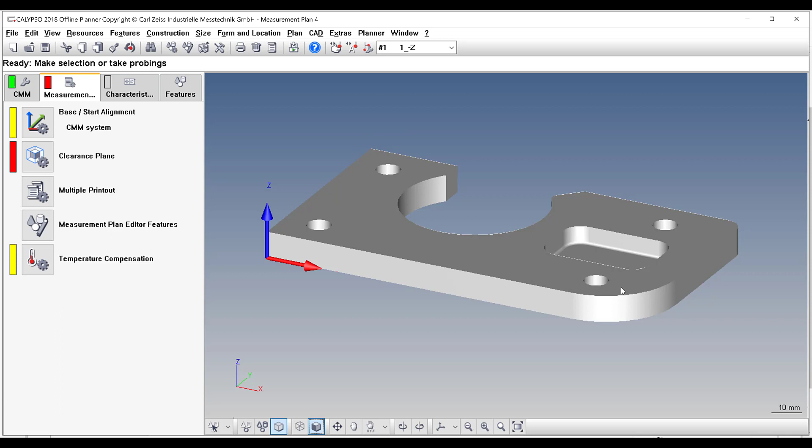Okay, so for this video, we're going to cover freeform surface around this workpiece to get the profile of a surface all the way around. We're also finishing inspection of mill part 4 here. So I've already imported the model. I have the drawing open, and you'll see we have this all around 10 thou profile of a surface to datum A. Datum A is the top of this workpiece.

All of the specs on the outside are basic to help, again, define the profile of a surface where it needs to be. All their specs are coordinate, so we'll take care of the alignment and the profile of a surface, and then we'll work on the rest of the pretty simple specs on this part. So I'm going to minimize here, get back into Calypso, and let's take care of our alignment.

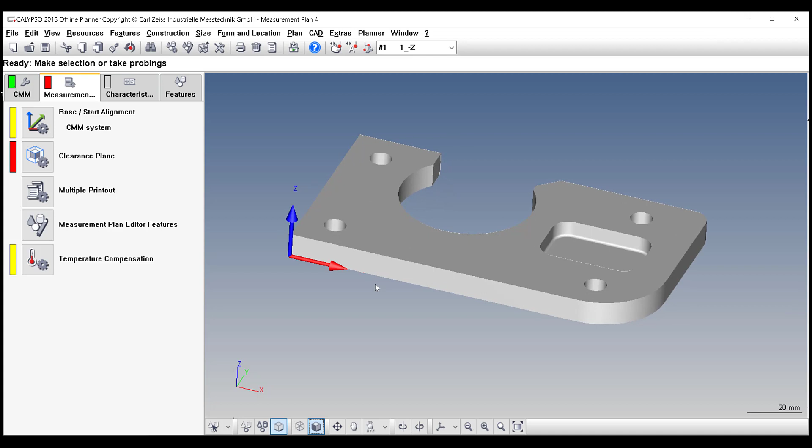Okay, so what I want to do is I'll get my start alignment. All right, I'm going to define the top plane. I'm going to define the front here. And then I'll define this left side. Okay. Then I'll hit OK. All right. Looks good. Let's take care of our clearance planes while we're in this screen here. Hit clearance planes from CAD model.

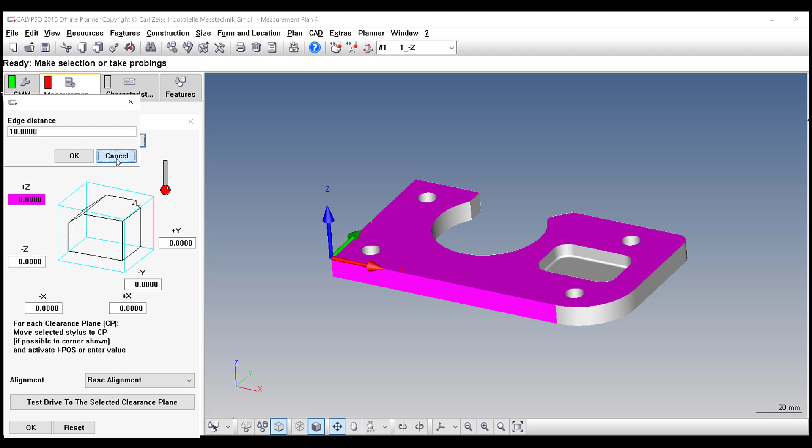I am in metric right now. Let's fix that. So to fix that, go to your measurement plan editor features, go into units, length unit, change to inches, and hit OK. Clearance plane from model. Let's change this to 1 inch. Hit OK. That's fine. Hit OK. All right, so now we're ready to start defining some things here, especially in our strategies. So we'll get into the features.

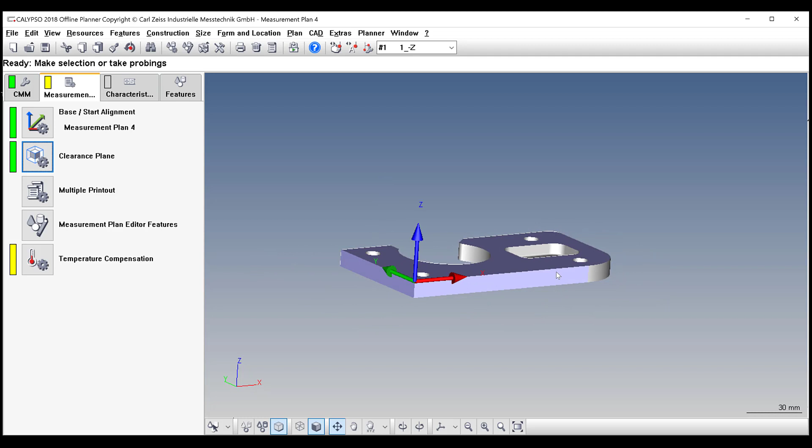None of these planes have a strategy yet, so I'm going to define plane 1 here. Take care of the strategy itself. A couple ways here. I'm just going to do a grid measurement. That does guess pretty well. The only thing I need to be careful of is how we're fixturing this. Are you fixturing to the holes with the fixture plate that was used to manufacture it? Things like that. You need to be a little careful.

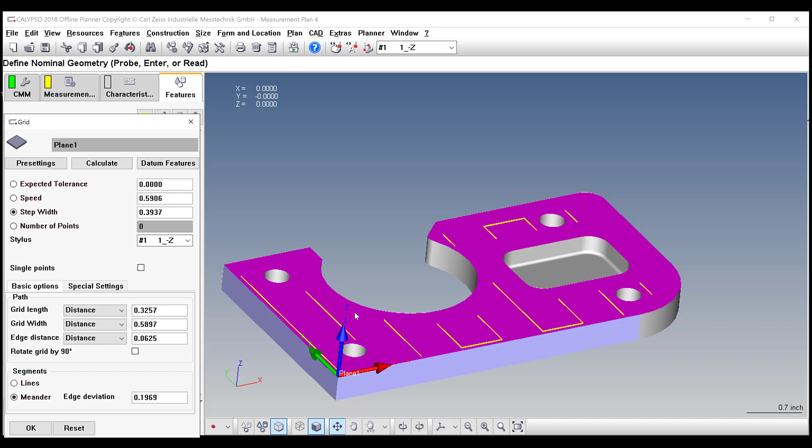We could put a clamp here. We could put a clamp here. We could grab it in a vise. Either way. So I'm just gonna leave that like this. We'll edit the grid. Let's take a look at some of the specs we can have here for distances and edge distance. Again, you could rotate if you want. All right. Let's do an edge distance of, let's say, a 16th. Let's double that roughly. Okay. That looks good. So we'll hit OK.

Now for the evaluation, I'm not going to get into the cookbook settings quite yet. If you're in class with me, I will show you the cookbook and we can type those settings in. But I'm not really worried about that for now. I'd rather have you look it up; I don't know what kind of probe you're using. I don't know if it's active or passive or what's going on if you're watching this on YouTube.

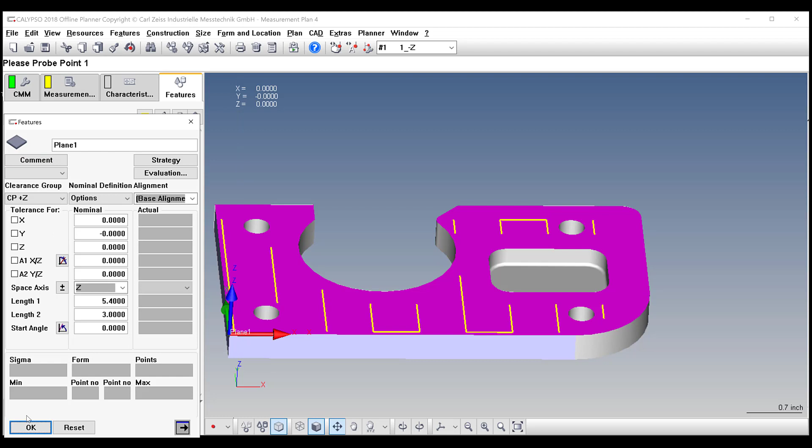So for right now, I'm going to leave that blank, but know that you need to have the cookbook. You really need to apply it, live by the cookbook for all your filters, outliers, your evaluation methods, things like that. So hit OK for now in the feature and hit OK. Take care of plane 2.

Now, plane 2 is really part of the profile of a surface, but we're going to end up doing freeform surface from curve. So this is just for alignment purposes for us. We could align off the holes, that's fine too, but this is a nice simple alignment, so it's not really that critical, especially because there's no ABC datum reference frame for this workpiece. So I'm just going to do a polyline for this one. And the polyline, I'll go from model. And I want the edge distance to be 1/8 of an inch. So that's good.

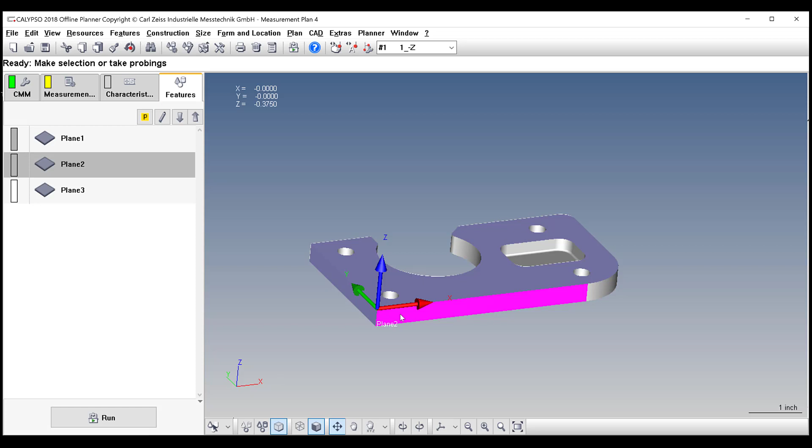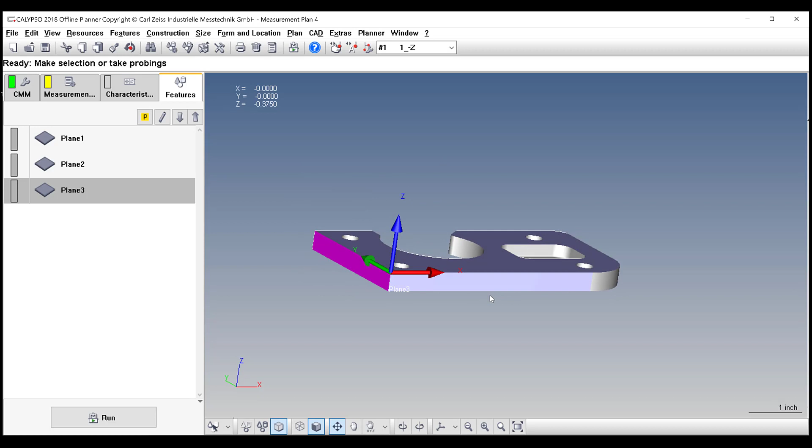All right, and we'll take care of plane 3. Now, plane 3, it's really easy to go in there; we could do the paintbrush or transfer format down into plane 3, but it's just as easy to do a polyline and go back through this quickly. All right, so we're all set here. All right, we are aligned. And now the first thing we take care of is this profile of a surface, because that theoretically should be new.

We'll end up doing 2 curves, and those curves we use to define the freeform surface. The reason I like to select the curves is because the toolpath flows better, in my opinion. So we'll put a transition here, and we'll continue with profile of a surface using freeform surface in Calypso next. Okay, so let's section this, 2 sections on this, and then we'll get a freeform surface defined from those curves.

So go to CAD, creating features, section. I'm going to select this top surface, put the vector to 0, 0, 1, so it's perpendicular to the z-axis. Get my extents all the way over. Okay, something like that. Make sure it covers the whole workpiece. And then I'll do the negative z height for this particular curve at 1/16 down.

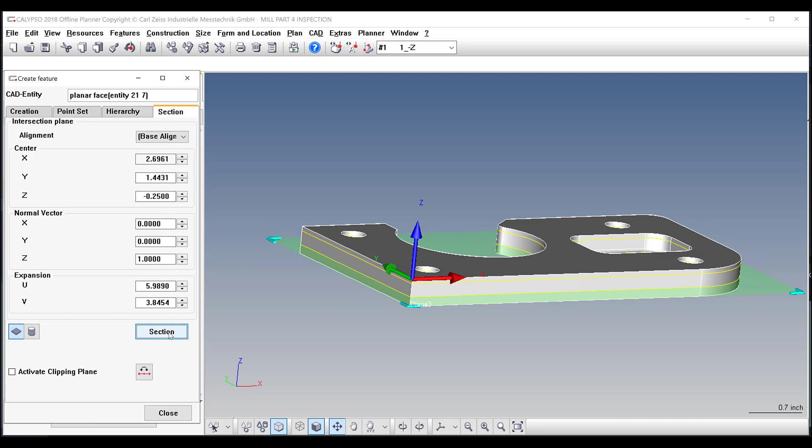Its section. And I'll do another one at 1/4 inch. All right, so let's take care of creating a freeform surface now that we have all of our sections created. To do that, we could have done it in the CAD window, but we'll end up going into Features, Special Geometries, and all the way down to Freeform Surface.

And then we need to open that up, and here we can start selecting our point geometry, or actually chaining these around like we did with the 2D curve. So we'll go to Strategy. And here's the clearance data. We're good here. Clearance group, we'll update that here. We'll go in and just go clearance planes Z positive. And the strategy, now that should be there.

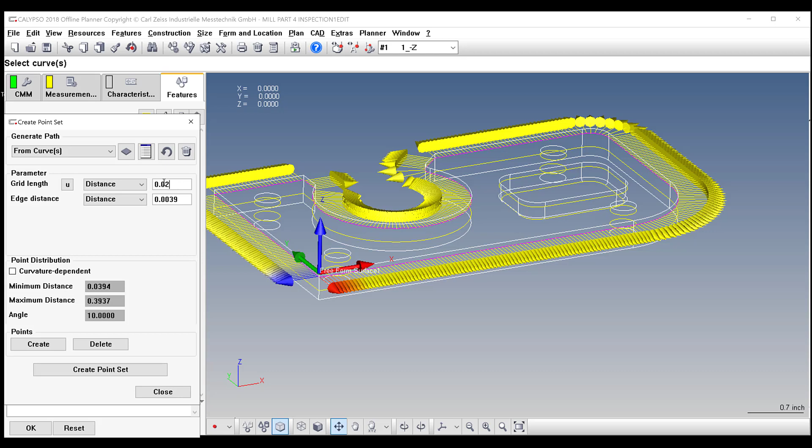Now we can go into this option here, which is define point set. And then we'll go from curves and start selecting the upper portion, or this first curve up on top. Okay, and then the distance for the grid length, we'll put around 50 thousandths, let's say. And then we'll create it and see what it looks like. That's good. Okay, let's reduce that to 20. And create. All right, and then we'll go create point set. And then once this is done, we'll see a point set in our strategy for this freeform surface.

Right here. So now what we want to do is I'm going to right-click, copy, right-click, and paste the clearance data. And we'll take care of the lower curve now. So we'll go to here again. We'll go to from curves, and we'll start selecting this all over again. Just doing the lower portion. Okay. We'll change the distance to 20 thousandths like the previous. We'll hit create, see what it looks like, and then we'll hit create point set and close.

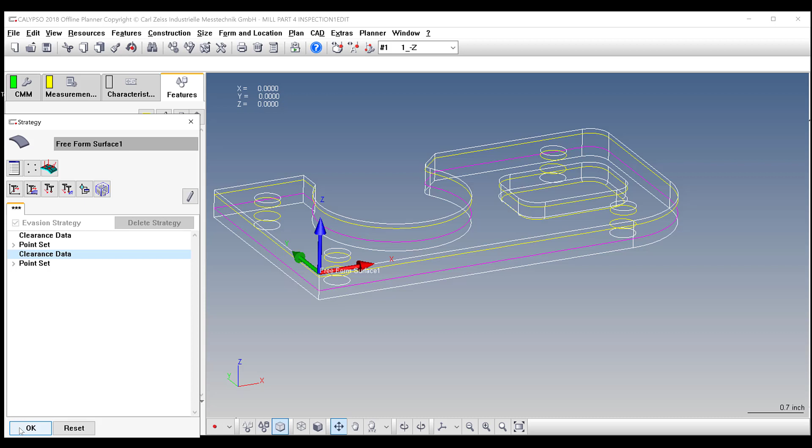So I want to make sure there's a clearance data in between here. So I'll just cut this one and paste it here. So that way it bounces around and does not interfere. Okay, we want to make sure that there are two separate chains or two separate curves that define this freeform surface. So we'll hit OK here. And then before we get out of here, I'm just going to hit surfaces used, and this highlights all the surfaces used in this geometry. Okay, you'll see them all there. Okay, and that is our nominal data. All right, so we're good there. Clearance plane Z positive. We'll hit OK.

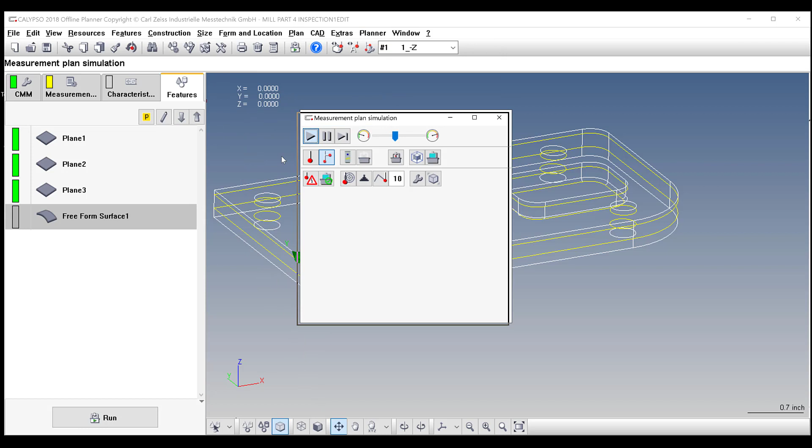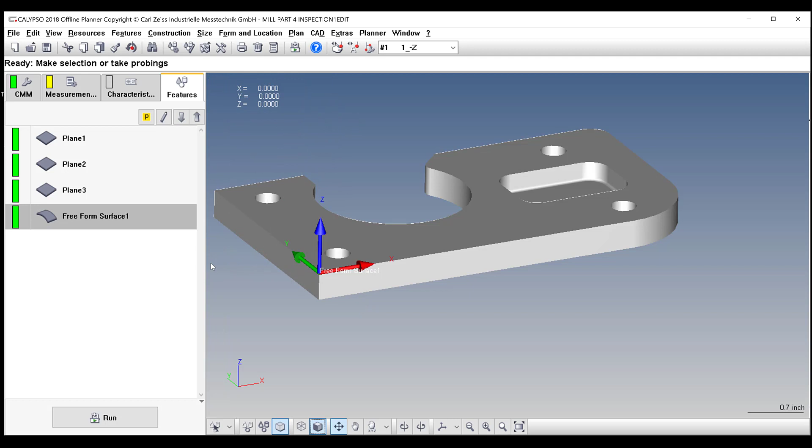And then let's go into the planner and actually let this run. I'm just going to execute this one feature. And I'll turn this solid while we're at it. And at the end here, hopefully we'll see a clearance plane move. Or a retract. We just don't want it to have any issues transitioning. So it goes up to clearance, goes back down again, and comes in and measures. Okay. So that's it for the freeform surface. We'll transition here, and we'll come back and take care of our profile of a surface all the way around this workpiece.

Okay, so let's apply the profile of a surface characteristic to this freeform surface. If we look at the part, it is a 10 thou bilateral all-around profile of a surface to datum A. Because again, profile of a surface is bilateral unless otherwise specified. So we'll go back into Calypso and go to characteristics, and I'm going to go to form and location, profile. The feature is our freeform surface, and the alignment now, since it's only to datum A, just select plane 1, which is datum A, and hit OK. Everything else can be left blank.

I know there are some talks, some people put plane 1 for each of these, but because this is a freeform surface, this is totally acceptable. So this will be, profile 1 is fine. I'm not going to go over naming or anything. You can name that as you see fit, tolerance it, whatever. The tolerance is 10 thou. Okay, bilateral. All right. So we'll hit OK. And our profile is done. Okay. So that's profile of a surface. Again, if we look at our workpiece, that's the only geometric tolerancing on this workpiece.

What we can do now is take care of some of these other coordinate tolerances. So I'll start taking some features around here. I did put my base alignment down to lower left corner. That's on purpose. Most of the features do come from there. Some come from this upper right corner, so we can end up doing another secondary alignment up here. So for right now, I will put a transition in just to let you catch up with the profile. I know it didn't take very long, but I want to make sure that it gives you time to do that. And then we'll come back and start taking the rest of these features. Okay, so let's take care of these hole locations here.

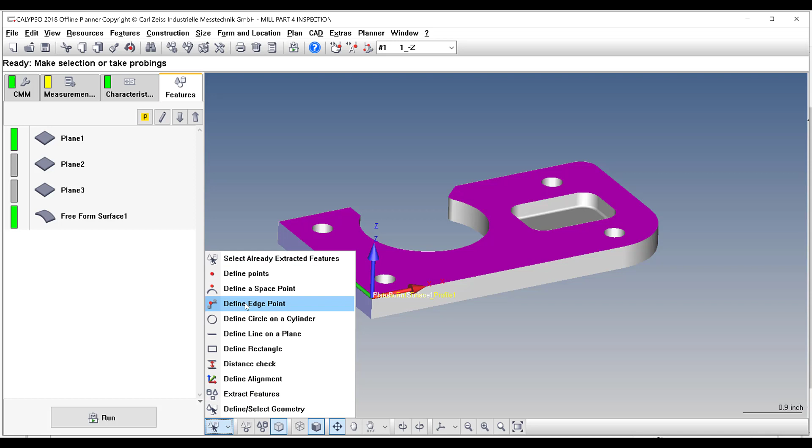So we'll get into our feature selection window here and go to define circle on a cylinder and take care of these 4 circles. Okay. And the strategy should already be in there. And again, I'm not getting into the cookbook for speeds and the angle range going past, things like that. We could talk about that later. Again, I don't want to post the cookbook on YouTube.

Again, here's your filters and outliers. Okay, and then if this were a geometric part, a positional tolerance, it would be inner tangential for our fitting algorithm. But I'll cover that in another video or in class. So we'll hit OK. And now circle 1.

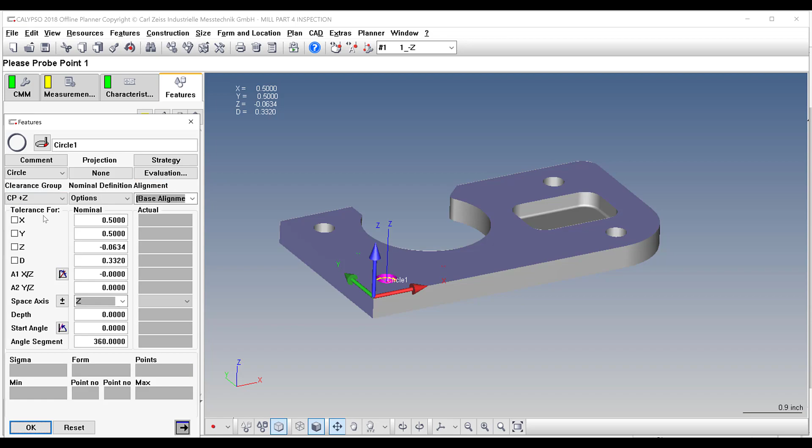Okay, if we look at our drawing, we can output characteristics for the locations from the base alignment for these 2. And we could also do the Y for these 2. The X is going to be 4 inches polar coordinates, or we'll do a polar distance for these 2. So let's get back into Calypso, and we'll output the X, Y, and diameter for circle 1.

The tolerances on this workpiece are plus or minus 5 for the locations, and the diameters are plus or minus 10. So we'll go back to Calypso. Diameter is plus or minus 10. And the hole locations are plus or minus 5. Okay. So we will hit OK. And we'll do the same thing for circle 2.

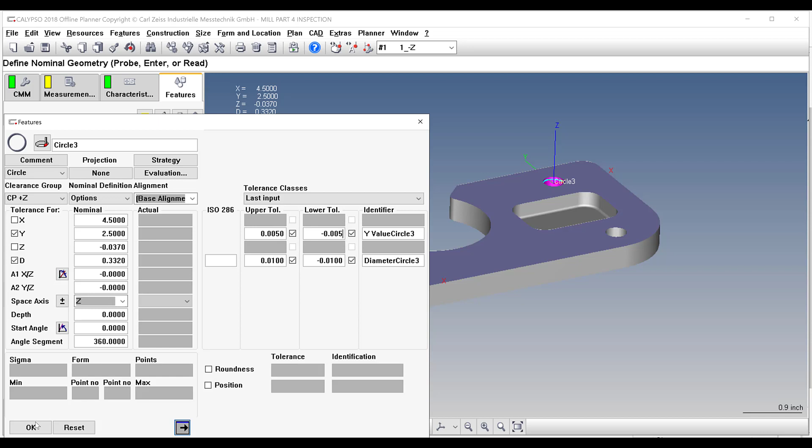All right. And we'll just do last input. And again, that's going to be plus or minus 5. So we'll just change these to 10. Okay. All right. Now 3 and 4. We'll update to do the Y values in the diameters. Okay. Circle 4 is same thing.

Okay. Now we need to take care of the distances between these. Now we could do a simple distance, or there's other methods, Cartesian. We could end up doing a different alignment on these holes and then doing distances from there. But we can just do simple distance here. There's also, I think, on this version caliper distance, which we could also use.

So right now, let's just do for circle 3 here. So this distance here, we'll go to size, distance, and we'll go to simple. All right. And this will be the X value, circle 3, something like that. The feature 1 is going to be circle 2, and feature 2 is circle 3, and the X is 4 inches plus or minus 5. The datum reference is a base alignment. That's fine. That's what we're using for this one.

We could also essentially, this is 4 inches, you can update different alignments. So let's say we wanted to tolerance this hole. We could do a new alignment up here, and simple distance would also work there. Besides just kicking out information from the feature, you can change the alignment in simple distance to output values from; you only need one feature, I guess what I'm trying to say. So you could put circle 2 from the base alignment and it will give you data here. So it's another way to do it. It's very similar to outputting in the feature like we just did previously.

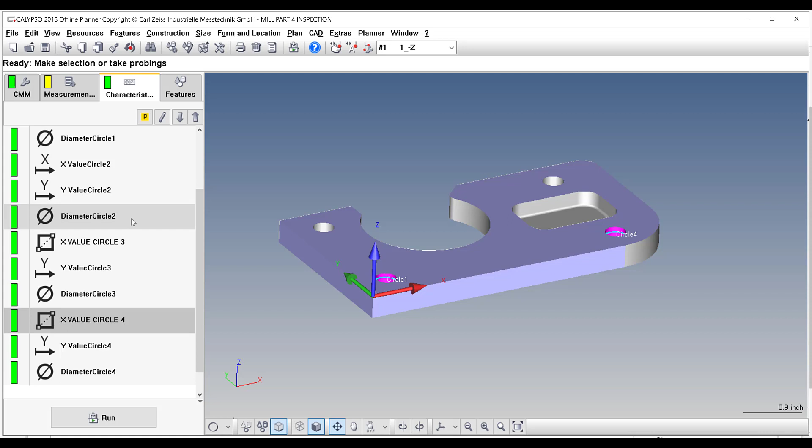So hit OK. We'll do the same thing. I'll just copy and paste it for circle 4. And circle 4 is automatically updated. I think that should be good. Yes. So what we need to do is change this one to circle 4, and I am going to change this circle 2. It's sort of irrelevant, but I will change it to circle 1. And we're good there. We'll hit OK. And we're all set. So there's our circle information.

What we need to do now is prep for our next feature set here. So we're going to put a new alignment in the upper right corner. And then we're going to tolerance the mid planes here to get a location. And then we'll tolerance these planes, splitting them about this to get the location correct. I think that'll be the best way for this. Again, we are tolerancing the 1.5. So the 1.5 will take care of this location.

We'll derive a symmetry plane here. The 0.5 from here will be fine to this plane, and then the 1 inch will spec out differently, and the 1.5 will spec out differently. So those can be Cartesian distances. I do like Cartesian distances when the features are planes. I think that works real easy. You don't need any datum information, and it tends to give a pretty good result. We could also do a number of other methods, but I think we'll do Cartesian for this one.

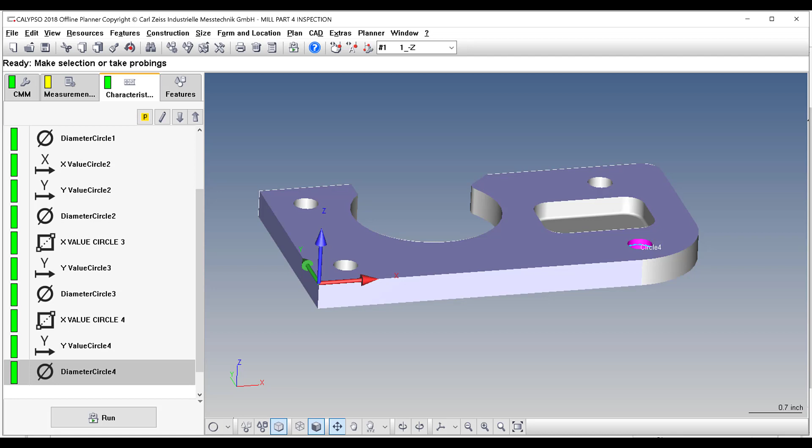So let's get in here, and before I do a transition, I will update the alignment. So I will go to Resources, Utilities, and Alignment.

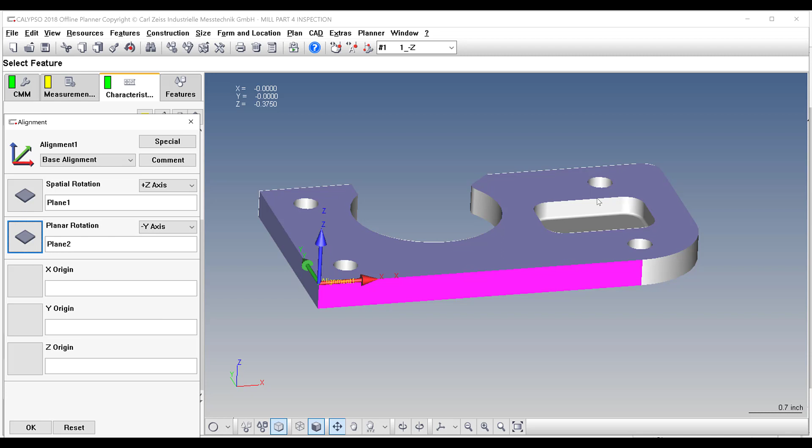And what we'll do here is update this: spatial rotation will still be plane 1. Okay, planar rotation can still be plane 2. All right, that's fine. Now, the Z origin will be plane 1. We'll get rid of that now. And then we're just missing information on the other side.

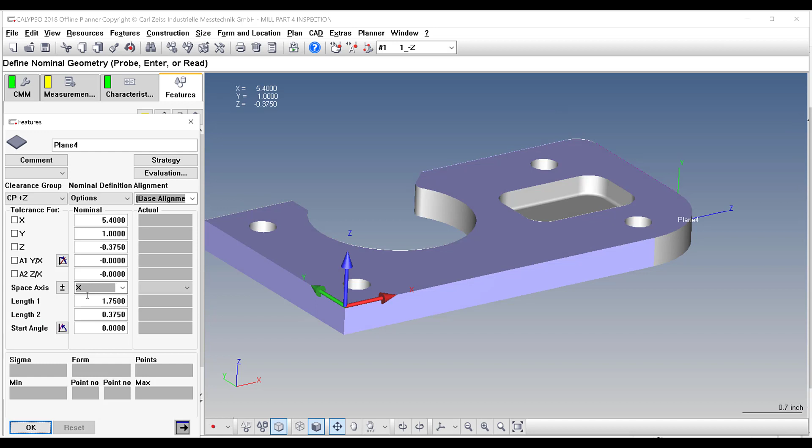So what we can do is take a couple more planes. So I'll do define select geometry here and here. Okay, and that'll be fine for this example. All right, so hit OK. And then we need to assign some strategies here. So for this feature, I will go to strategy. I'll do a polyline for this one. Polyline will be from model with an edge distance of 1/8 of an inch.

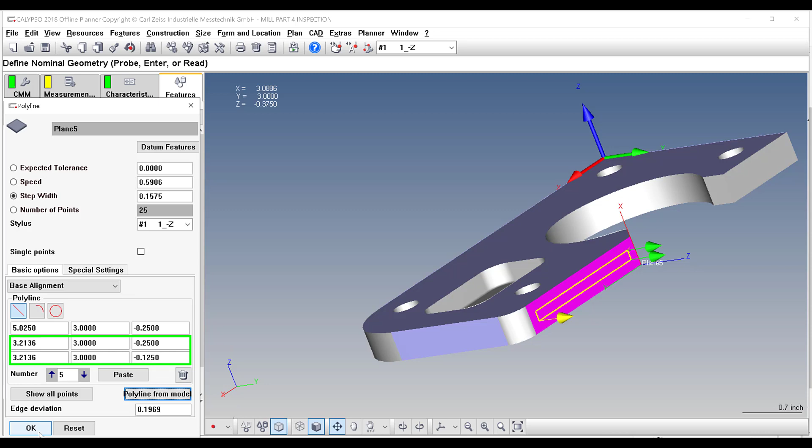Okay, I'll take care of the next one. It'll be the same settings. Again, I could transfer or do this in the feature settings editor, but it's really not a big deal to do it this way, just more mouse clicks. Okay, so 1/8 of an inch, we're good there. Okay, so those two are all set. I will right click and execute this alignment, make sure it runs okay. And we're good there. So now we have our new alignment.

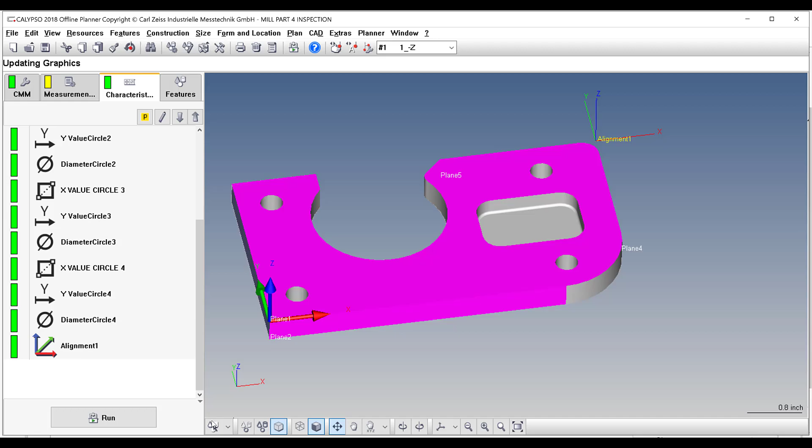All right, I'll transition here, and then we'll start taking features inside of this pocket and get the characteristics we need to finish up this workpiece. And we will do a result element for this final 375 stock thickness. All right, so let's get the features we need for this pocket. I will go down here and go to define select geometry and select the planes that I want.

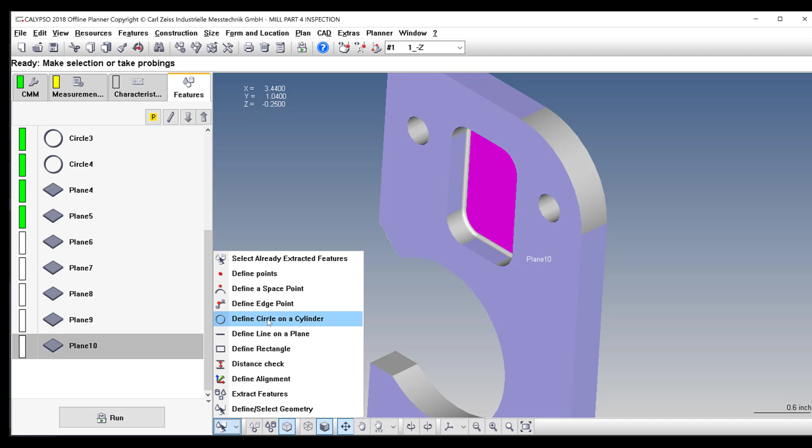And the bottom. And then I will also go to define circle on a cylinder and take care of these arcs. Now these arcs should be a default of 1/4 of an inch. I know the drawing is not updated for that. It was a revision. So we will just tolerance them at ±5 for this example. So planes 6 through 10 need to be updated.

So in here, let's go to strategy and let's do a polyline and from model and give it an edge distance of 1/8 of an inch, and that's fine. I will update the number of points to, let's say, 250, and then I'll hit OK. And then make sure the clearance group is Z. So we're good there. So hit OK. We'll right click on it and execute now to make sure we don't have an issue, and we're good.

So what I want to do now is transfer that information from plane 6 to the other planes and just make them all the same. And again, you should cite the cookbook for all of that strategy, filters and outliers, but I'm not focused on that for this one. Sorry to sound like a broken record, but it is very important that you do that.

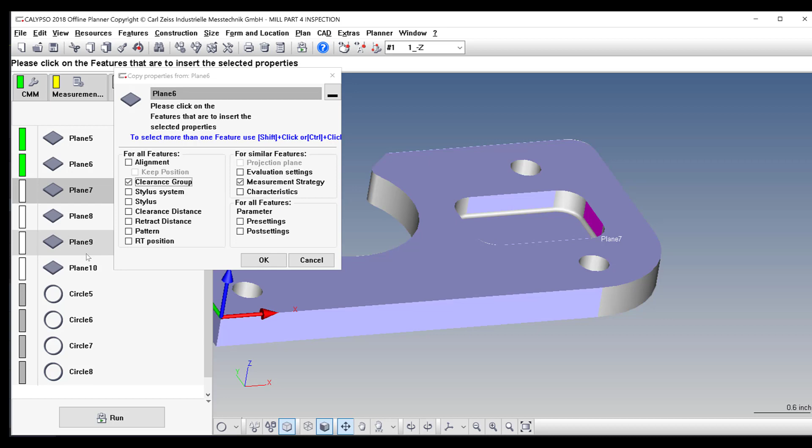So with plane 6 selected, we'll select the paintbrush option. We will transfer the clearance group and the measurement strategy to plane 7 through 10 and hit OK. Double check, Z positive, strategy, polyline, we're good there. So let's go through these planes, right click and execute now to make sure we don't have an issue. All right, we are good.

We'll do the same thing for the circles just to make sure, right click, execute now. Okay, so they ran successfully, at least from a computer standpoint. We didn't run it in simulation yet to see for crashes or anything, but we are good to go. So let's take care of our initial, ½ inch minus ½ inch from this new alignment, ±5. So we'll get back into Calypso.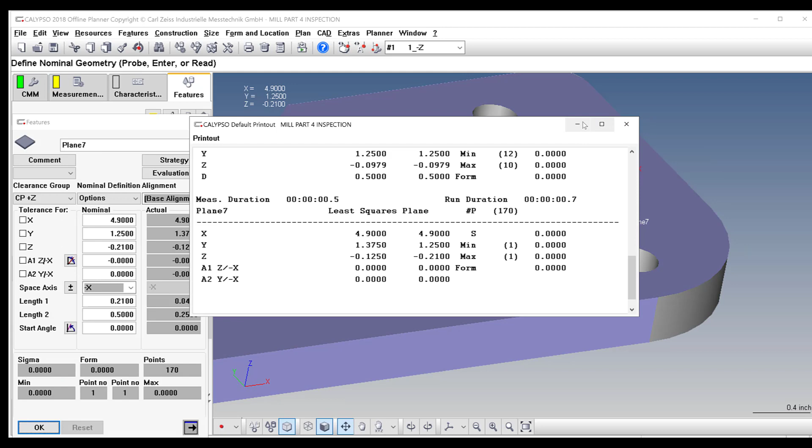We'll go to, looks like plane 7. We'll open up that, and I'll do a X value, but the thing is, it needs to be from alignment 1. See how the numbers change? So from alignment 1 in the X, ±5, X value of plane 7. We'll leave it at that for now. So hit OK. There's our X value.

And again, your numbering really should be a bubbled drawing. So bubble this, bubble that, that thing. That does work really well. But your organizational scheme is totally up to you, and it could be up to you at your facility. So I'm not going to worry about that for now. This part is simple enough that it's not hard to derive what is what. So let's take care of the next one.

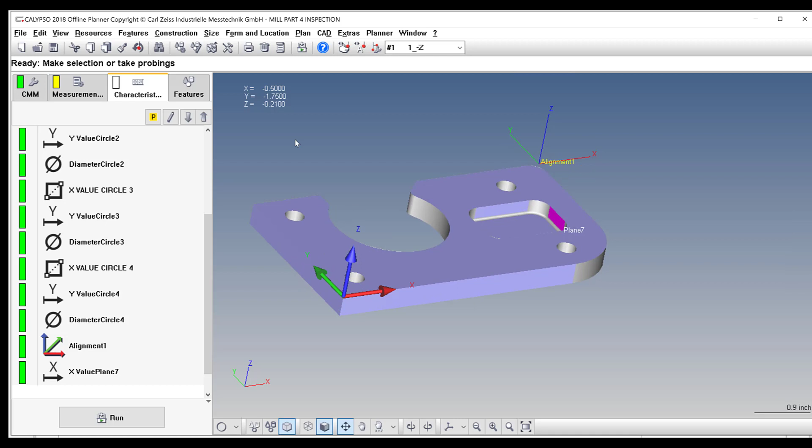So the next one for the location of this is going to be 1.5 in the Y, negative, but it's a symmetry plane. So let's go back to Calypso, and we'll go to Construction, Symmetry. And this symmetry plane will be between plane 6 and plane 8. So hit OK. And this will be midplane pocket. And we will tolerance this in the Y.

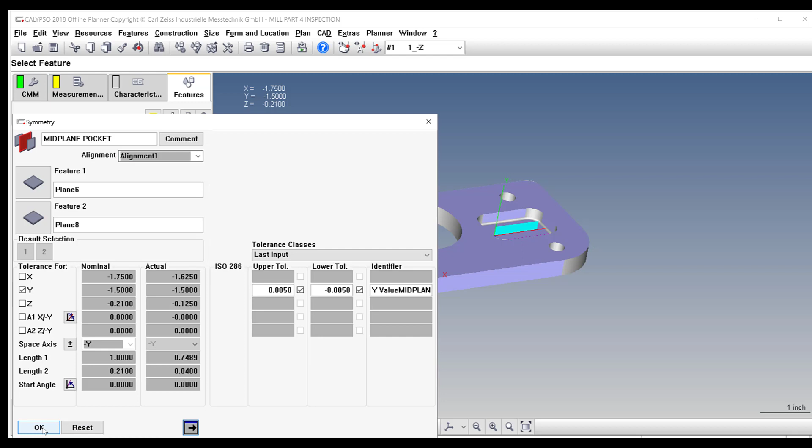Now, the issue is this is coming from the base alignment. We need to go to alignment 1, Y, plus or minus 5. So hit OK. There is our characteristic. Now we need to take care of the actual sizes of this. Okay, so it's 1.5 by 1 inch. We'll get back into here, and let's do a caliper distance. So we'll go to Size, Distance, Caliper.

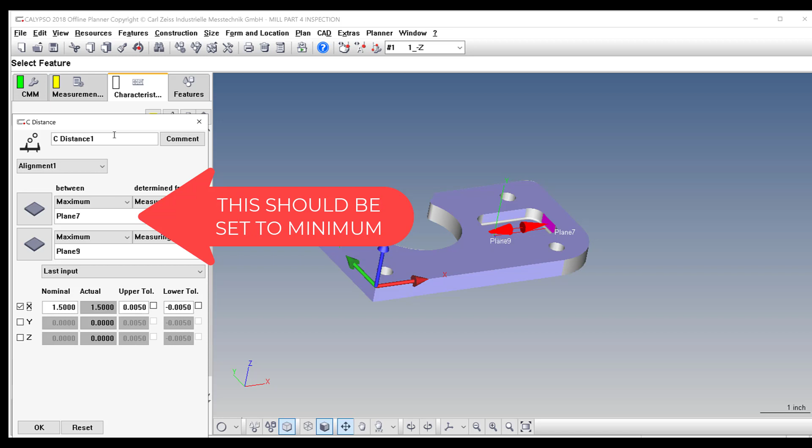And in caliper distance, from the base alignment, which is fine, we could do alignment 1. It doesn't really make a difference for this one. Since all these features are coming from alignment 1, we'll work with alignment 1. We'll go between plane 7 and 9. Hit OK. Should be 1.5. That matches the drawing. 1.5 plus or minus 5 in the X. And that's good. All right. So we'll leave that there. We'll hit OK. And then we'll do another caliper distance.

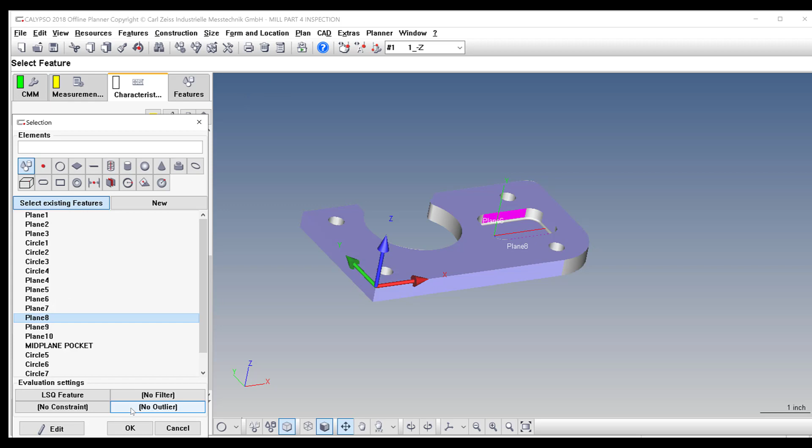And we'll go the other direction. So we'll go, and again, I will change this to alignment 1. We'll go from plane 6 to plane 8. And in the Y, that is 1 inch. Correct, plus or minus 5. So we'll hit OK. There's our caliper distances.

Now, the last thing we need to take care of are the arcs. Okay, so let's go ahead and go to the features. And now these circles are going to output a diameter. We don't want that. We want to output a radius. So we'll go to Size, Standards, Radius. And in here, we'll open it up and go to the feature, and we'll select circle 5 and hit OK. 1/4 inch radius, plus or minus 5 is fine. This will be radius 1.

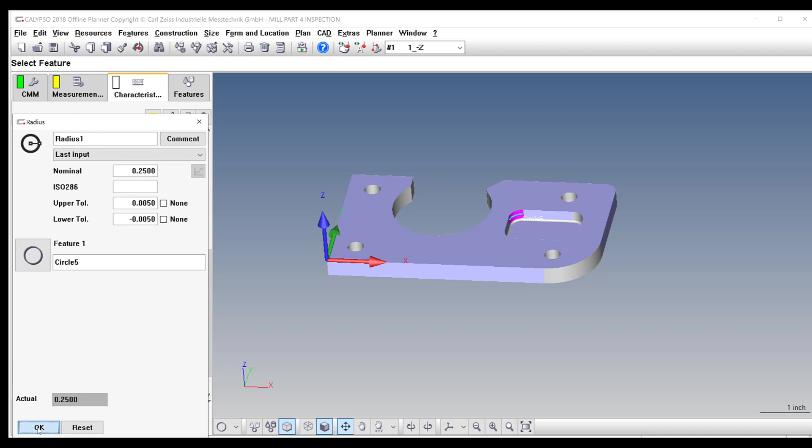Hit OK. Now, instead of doing that again, we should be able to go to Features, circle 5, go to the transfer, and it's going to be the characteristics, and then select circles 6 through 8 and hit OK, and all the radius should go with it. So even characteristics that are not in the actual window here will translate when they relate to that feature. So we're good here. And I'll rename this just to have it sync up. This will be radius circle 5.

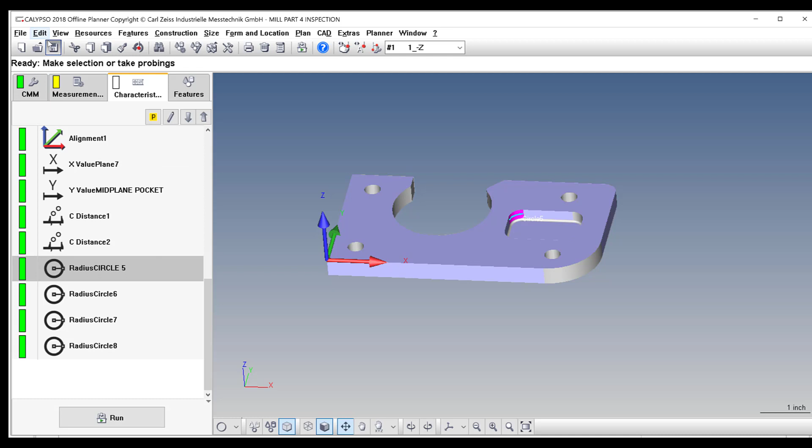Okay, good time to save. And I think that's about it. We do need a result element for the 375 stock. We'll just check that with a mic. So we'll get back into Calypso, and we'll go to Size, More, Result Element. And in Result Element, this will be thickness, or stock thickness. And it's going to be 0.375 plus or minus 5, I think.

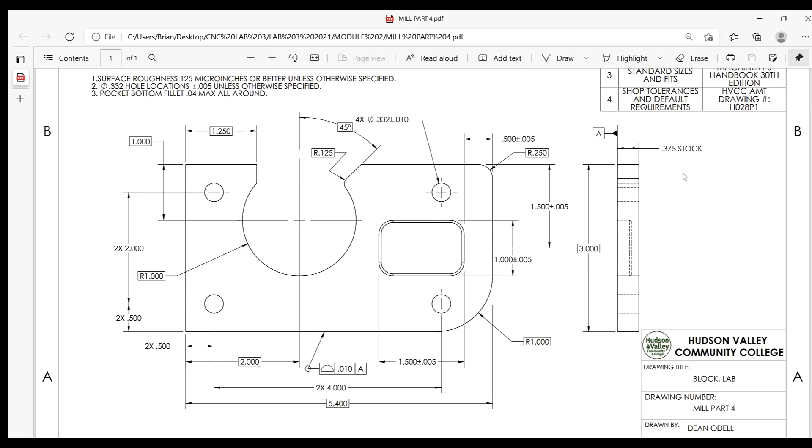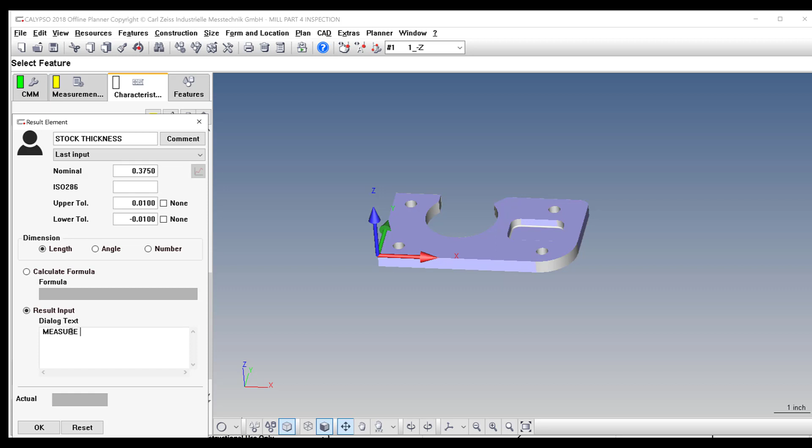Let's double check that. 375 stock. That would be in our shop standards for what the actual tolerance is. I'll put plus or minus 10 for now. And we can address that later, I'll look at the shop standards and we can address that in class. So we're good there. Result element, dialog box, measure, part. Okay, then hit OK. So we'll hit save.

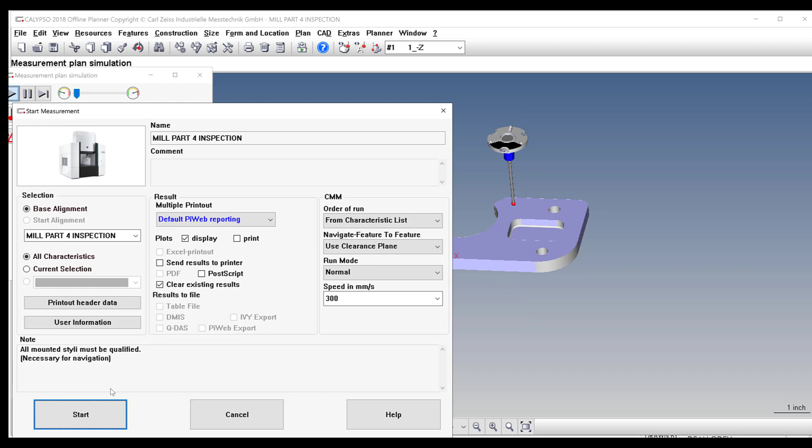And if I double check the drawing, I think we're all set. We have the profile, we have the pockets, we have the holes, we have the stock thickness. That is really it for this one. I will simulate this now. So I'll go to Planner, turn my measurement plan simulation on. Run. Everything else here should be good. Hit start. And we can watch it run.

So here is our initial alignment. We did a grid for this. And there's different options, polyline, multiple polylines in the strategy to have it flow better. But grid is a quick way to do it. And again, we're only doing one. This is for learning. This is not for production. You can do multiple grids on a workpiece. You can do all in the same strategy. So that strategy dialog box is super helpful.

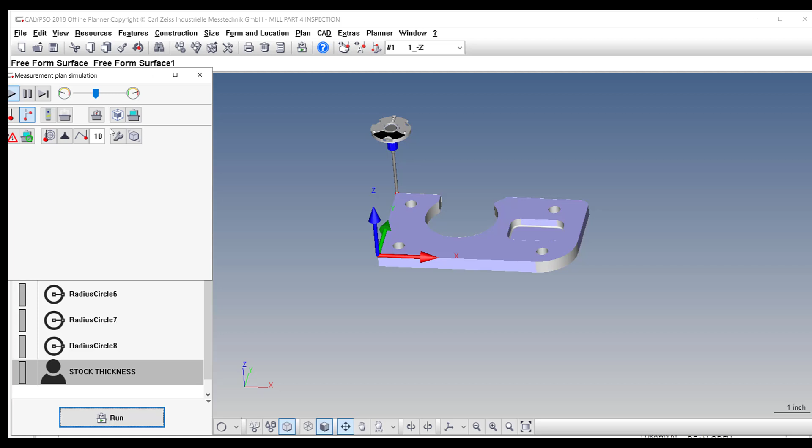All right, here's our scan. Freeform Surface. Now, I did not update the evaluation to get rid of the corners because, again, it's up for debate, but the corners are technically part of the profile of a surface, so I left them alone. And you'll see in this pocket, it does bounce around a little bit, so I'm not worried about that.

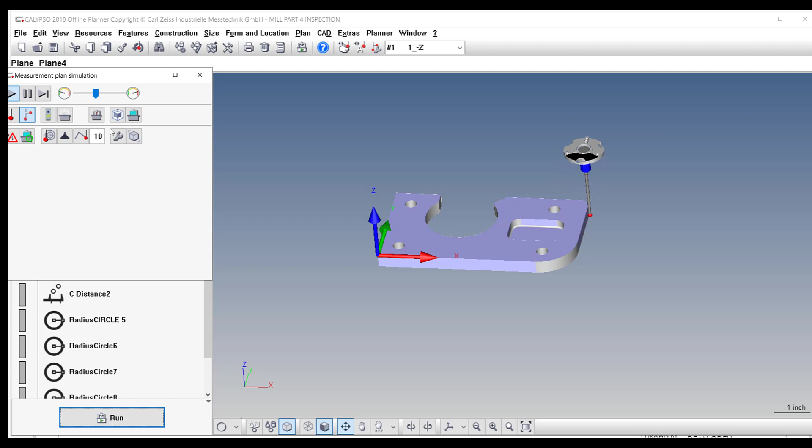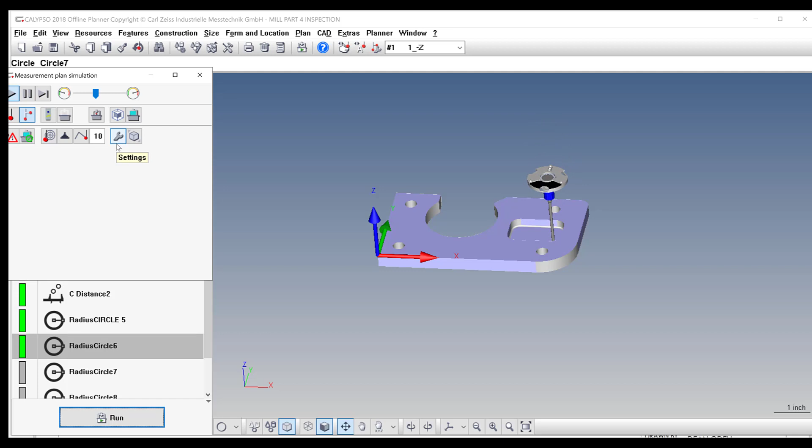Oh, one thing we did forget was the depth of the pocket. And again, if it's not in the drawing and the notes, then we'll just update that. There's the arcs. So we're good there. PiWeb's going to load. Part thickness 0.375. There's our result element. Let PiWeb load. Okay, everything looks okay. So we will close this out.

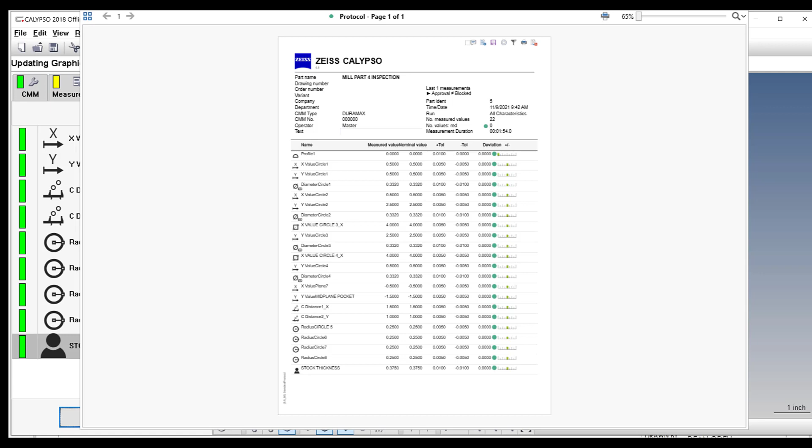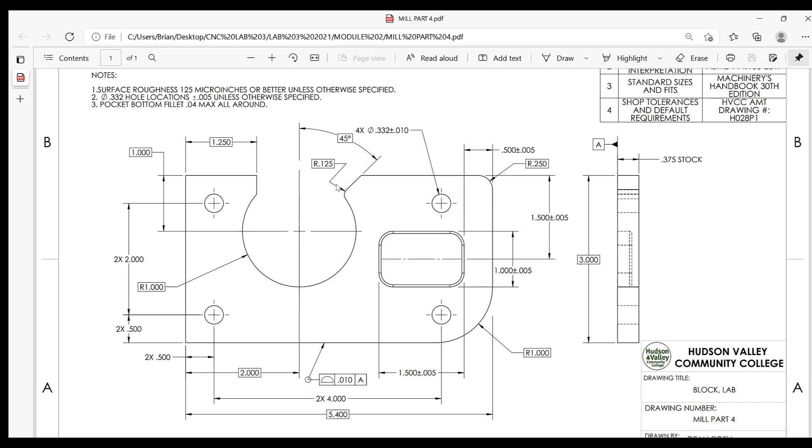And we need to do the depth of this pocket. So that's pretty simple. We will go to plane 10. Do a Z, quarter inch, plus or minus 10. That's fine for this. Maybe it is on the drawing. Oh, there it is. Nope. It'll probably be a note in the future. Again, I don't know what revision this is. So just keep an eye on that for the future, the actual pocket depth.

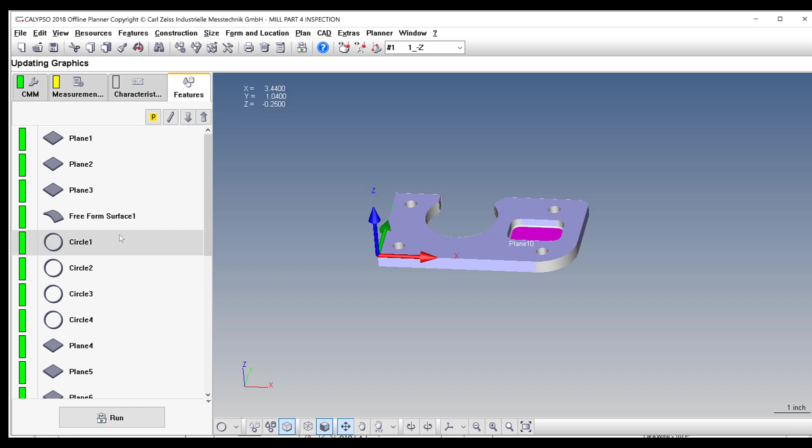Okay. So let's go back into Calypso. This is fine for this. We'll hit OK. And there's our plane 10. I'll just execute now. We're good to go. So that's really it. Again, everything has probably been sort of rinse and repeat as far as the circles and things. But the freeform surface was new and the profile of a surface was new. So I figured I'll do the whole part, but I did that first. That was the main focus of this video.